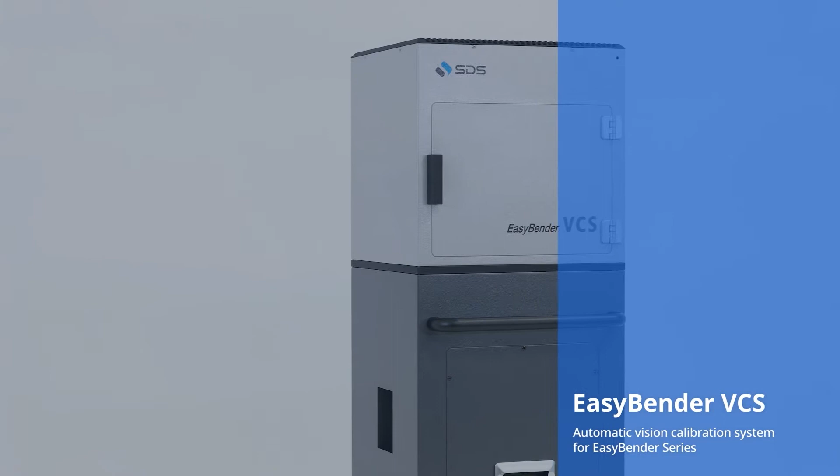Having trouble calibrating the EasyBender due to lack of information? Are you always in need of increased accuracy to get the bender ready for challenging dies? This is the EasyBender VCS, an automatic vision calibration system for the EasyBender series.

EasyBender VCS is a camera-based automatic vision calibration system. No need to dig into an old manual. Angles and arcs data can be adjusted and updated in the nick of time.

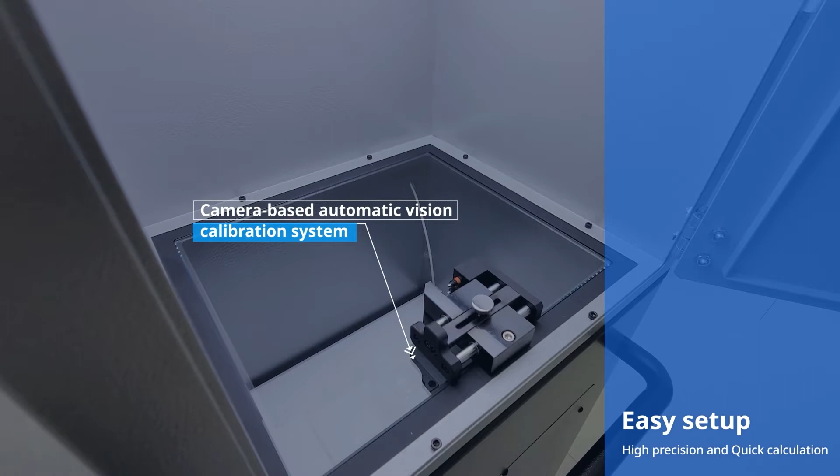EasyBender VCS is a proprietary system developed by SDS. It's an intuitive and easy-to-install standalone unit that can be set up with any EasyBender manufactured after 1999.

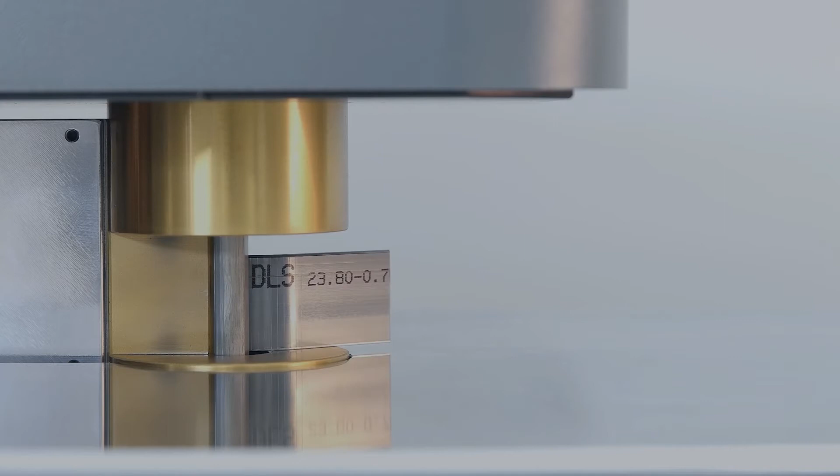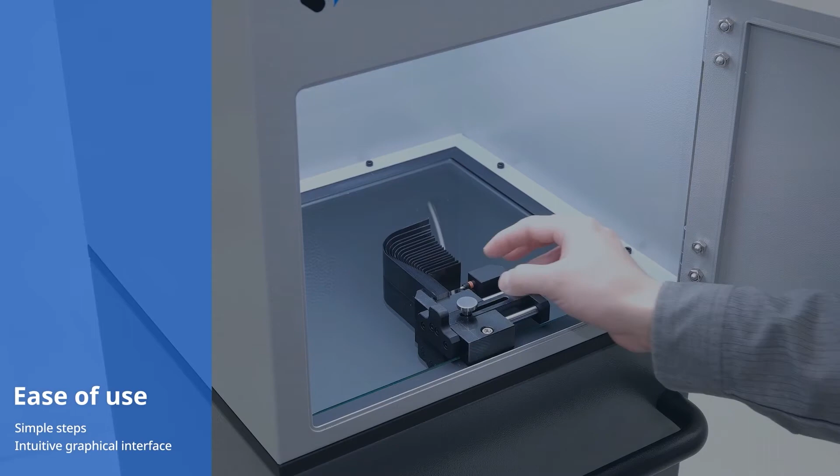EasyBender VCS is exceptionally fast and accurate. The angles and arcs of pieces will be measured and updated in seconds when a batch of bent pieces is placed in the system.

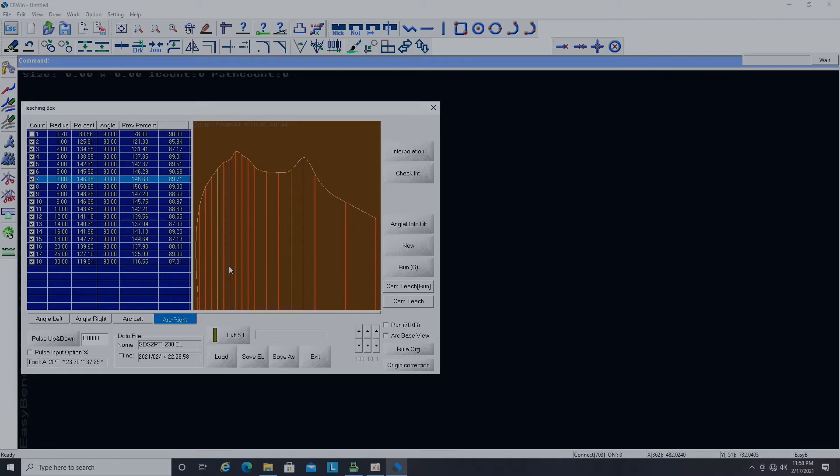The smart algorithm of EasyB software finishes the entire calibration process in a few clicks of a button. EasyBender VCS can save you time and increase the productivity of EasyBender.

Regardless of rule thickness, height, and bevel type, EasyBender VCS is designed to calibrate the rule for you, minimizing downtime and maximizing the productivity of EasyBender. Cutting rules require constant calibration over a period of time.

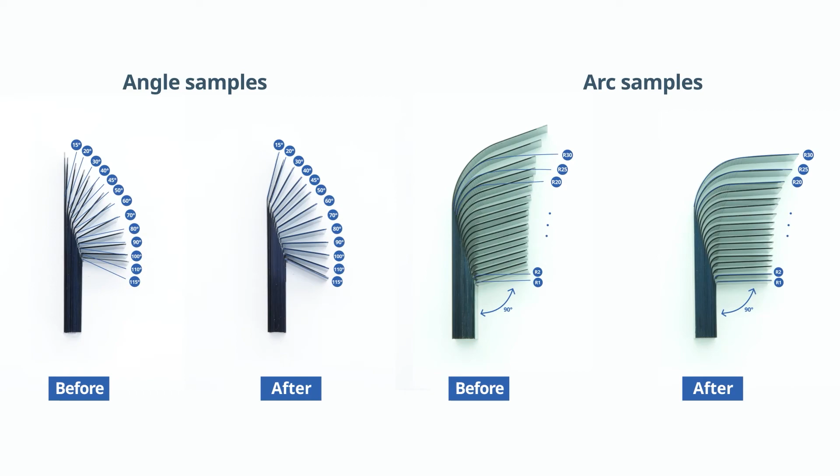EasyBender VCS is designed to accelerate the calibration process to maximize the efficiency of EasyBender. It will reduce the time spent on calibration to less than 1/10. Die makers would not be required to use their manual tools with EasyBender VCS.

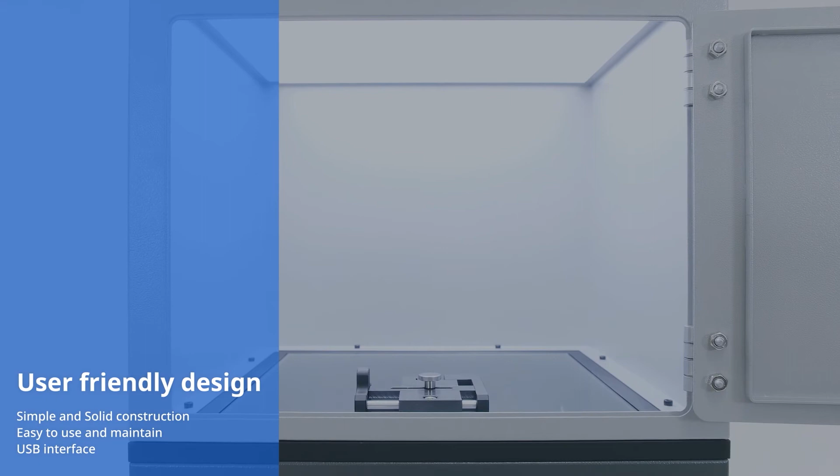EasyBender VCS lets users be free from calibration. It's designed to move around the shop with its built-in casters to maximize productivity for those who have more than one EasyBender.

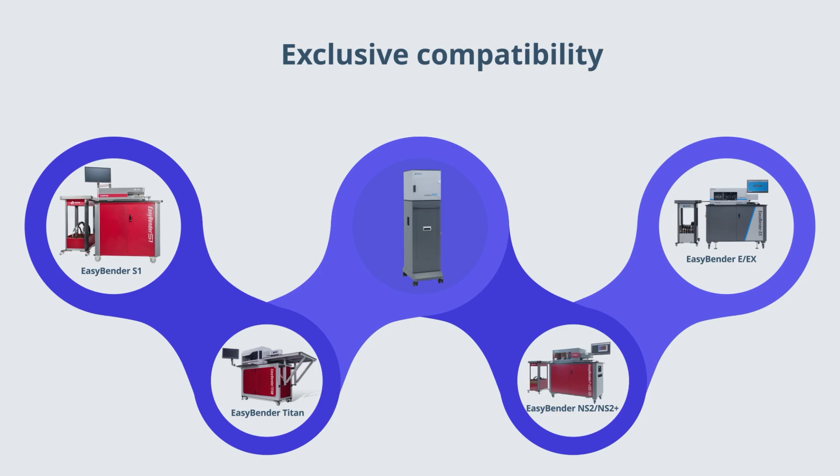EasyBender VCS is compatible with any EasyBender. It will always get you the pieces you want with new or existing EasyBenders. Trusted for over 30 years by thousands of die makers worldwide.